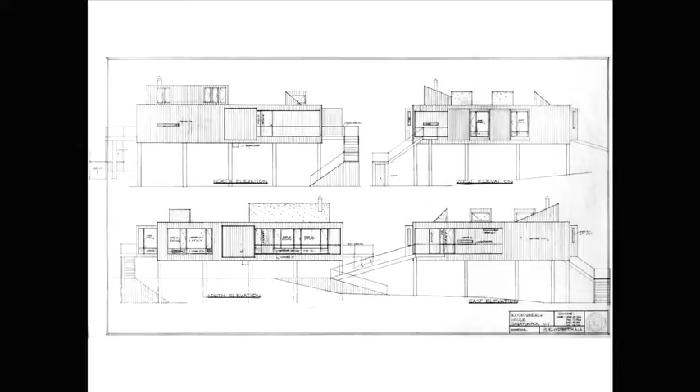Anyway, personally, I started designing and building while still in school. At the Yale School of Architecture in the late 60s, there was a culture of what one might call can-do. This was partially due to the ethos of the times, which was challenging the status quo at all levels of society. Perhaps it was a kind of arrogance as well.

For several of us, weekends were spent framing houses, learning about plumbing and electrical wiring, and explaining our designs to clients, who were spending very little money on these projects. Eventually, this led to the beginnings of the Yale Building Project, which continues as a first-year studio project to this day.

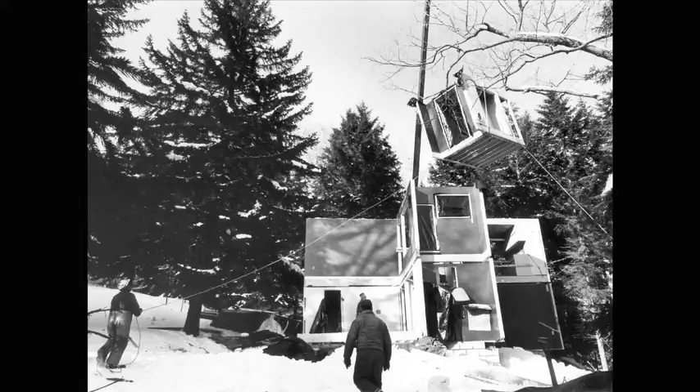These are 2 houses I built during this period, one with my own hands and the other partially so. There were several others, including prefabricated and modular buildings, following are images of past and present work that we have built since those very early days.

For me, from the beginning, the means and methods of building have always been inseparable from the equally important conceptual thinking at the heart of crafting architecture. Design has always been a seamless enterprise, starting with analysis of a client's wants and needs and concluding with a finished working building. Never did it occur to me that one might first design a building and then figure out how to build it, or for that matter, give it to someone else to build.

From a philosophical point of view, a further contention is that theoretical and aesthetic claims can best be evaluated when they are embodied in real buildings, which makes demands on architecture that paper and computer schemes do not.

It follows that the deeper architect's engagement in the entire process, from the earliest phases of conception to the final details of construction, the greater the chances for the actual realization of a design and the emergence of good architecture.

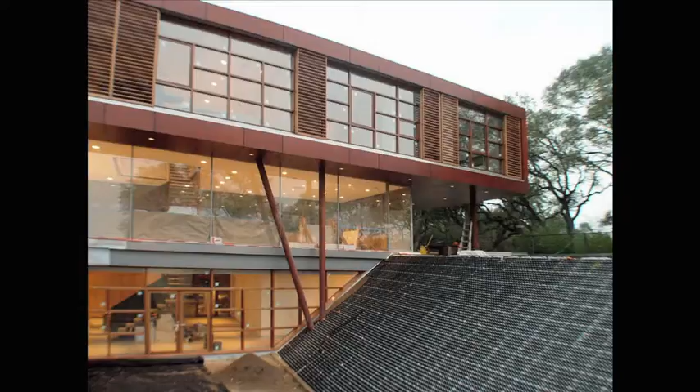From a more prosaic perspective, we attempt to bring into alignment the needs, those conceptual attributes of a successful building, its context or its fit into its place, its program or use, its structure or its sculptural material presence, and its social imperative or its value to society as a whole.

Complete overlap would in fact represent the perfect diagram. Of course, the perfect diagram is unachievable, but the greater the degree of this overlap and the quality of the poetic expression of that overlap in the building's final form is, to a large extent, the measure of its success.

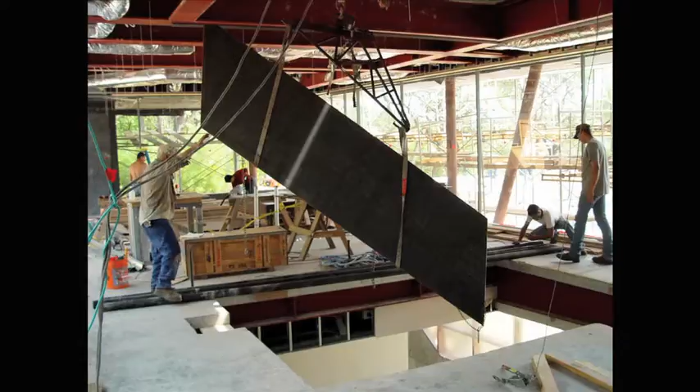What is the process by which we get as close as possible? We accept, in fact, we value the messy evolution that will occur during the development of any initial premise. Our design process is not a straight line. Rather, it is conceptually unpredictable. The process responds to the buildup of information that qualifies and colors design and makes the result rich and relevant.

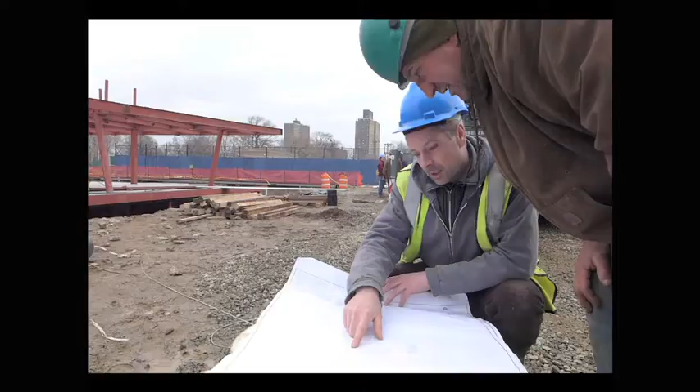It is a process seeking feedback from the many forces at work on its realization. We start designing knowing that we have great holes in our understanding of how the design of this building will evolve. So rather than fighting to keep our first idea pure, we instead anticipate the struggle that challenges to our first thoughts will provoke. Additionally, involvement in construction allows the feedback loop and consequently the design process itself to stretch over a much longer period of time.

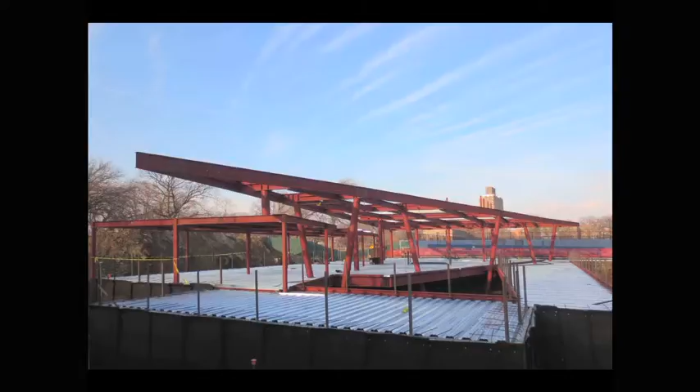We value all the players in our design-build program. We learn from all of our consultants, from individual subcontractors and tradesmen as well. Merging how we think and how we make into one single enterprise is critical to the development of our architecture. It is about making an architecture of substance.

We must have total access and transparent relationship with our clients. Architect-led design build provides clients with a single source of responsibility, thus freeing them from becoming judge and jury in conflicts between designers and builders. ALDB facilitates a clear channel of communication, avoiding siloed realms of expertise.

Having control of construction allows us to experiment and to push technical limits of design. Our increased level of control provides us with the confidence to assume risks often avoided to the detriment of better buildings. As one of many examples, we have built several underground structures, risking problems with waterproofing that reduce the building's visual impact, are sympathetic to special landscapes, and embrace passive, sustainable design.

We have organized this talk into a series of narratives or stories that we think best illustrate what we do. Our four principals, Thomas Gluck, Stacie Wong, Marc, and Charlie Kaplan, each will give a short discussion that provide insights into our architect-led build process.

Hopefully, I will win the bet. Thank you. Thomas.

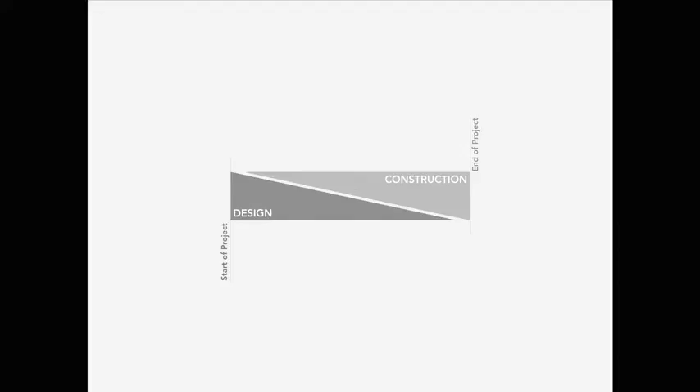The essence of our process of architect-led design build hinges on the knowledge and information gained by having contact with construction. In the traditional model of practice, there is little, if any, overlap between the thinking and the making. It is well known that design informs construction, but we find that construction is equally relevant during design. In fact, we often find its greatest value occurs during the earliest parts of the design process. For this reason, we have organized our practice to maximize the opportunities for the exchange of ideas between what we feel are the two inseparable acts of thinking and making.

It is the constant feedback and integration of construction knowledge during design and design sensibility during construction that not only allows us to realize our visions at their highest levels, but informs every aspect of the design process, from its conceptual underpinnings to its material detailing.

This first vignette illustrates how a project's most basic concept can be informed by how it should be built. In effect, our experience as makers shapes our process as thinkers.

The project is a house on Lake Michigan for a family of 7. The clients were raised in Northern California, and although their careers brought them to the Midwest, their hearts are tied to the West Coast. We were contacted to look at a potential site that the client was hoping to buy, but was known to have bad soil.

The site had been vacant for over a decade, passed over by many potential buyers. Before committing to the property, the clients needed to know if the site could be built on efficiently. When we visited the site, we were impressed with 2 experiences. The first was the experience from the bluff, 30 feet above the lake, a horizon of blue sky, blue water, and green grass. Equally compelling, but far more surprising, was the expanse of sandy beach at the bottom of the bluff, which was more reminiscent of California than the Midwest.

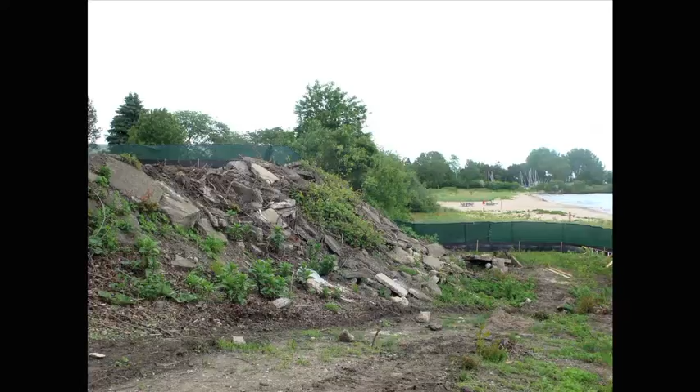Along the way, however, we very clearly encountered the problem. Poor soil was an understatement. The edge of the bluff looked like a construction landfill. Research revealed that the site was created in the 1930s when the North American location for the Baha'i Temple was being built. You can see the bulkhead in place to support the coming fill and the foundation for the future temple. Today, the temple stands directly across the street from the project and, given its scale, became one of the site's defining characteristics.

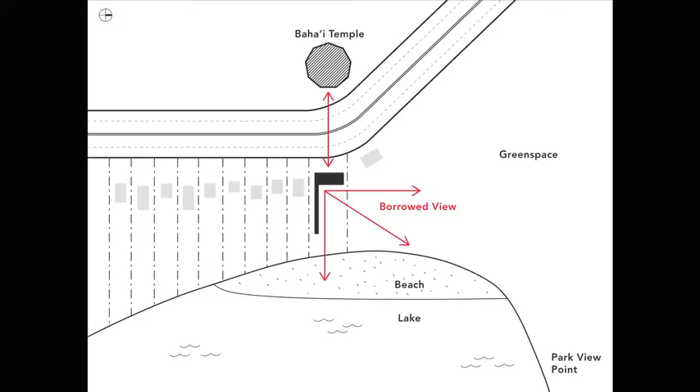This diagram illustrates the primary site strategies: contend with the institutional scale of the temple and sightlines from the busy urban street, and optimize the unique geography with its wide sandy beach and open green space to the north.

But before we could start designing, and before the client could even purchase the land, we had to contend with the soil. The logical solution was to locate the building on good fill, close to the busy street, but uncomfortably close to the temple. Moving it closer to the edge of the bluff would require an enormous amount of soil removal, replacement, and compaction, an expensive prospect given the depth of 30 feet. Piles and caissons were not an option due to the inability to drive and drill through the fill.

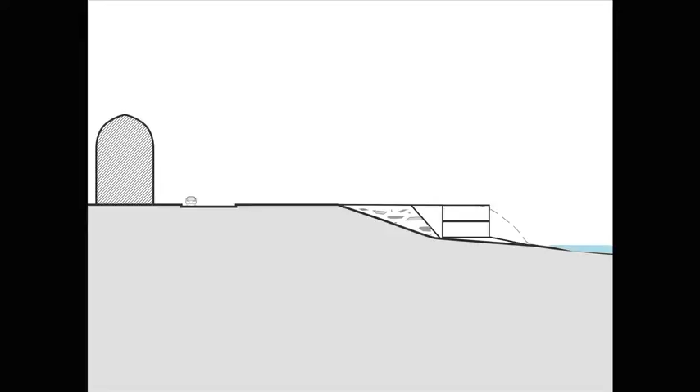Our solution: replace the bad soil with the new building. Still in pre-design, we vetted the concept not only with our engineers, but also with excavation, sheeting, and concrete subcontractors. Comfortable that the premium of the foundation could be mitigated, the clients bought the property.

Starting now with a technical solution of embedding the building into a bluff, we refined it to further accentuate the unique characteristics of the site. By pulling the building apart and following the line of bad fill, we were able to create 4 distinct outdoor yards, thereby stretching the program out over the entire property, allowing for more diverse and more specialized relationships of the building to the environment. The project then becomes about its section, a procession through a series of indoor and outdoor spaces as one descends down through the bluff to the water's edge.

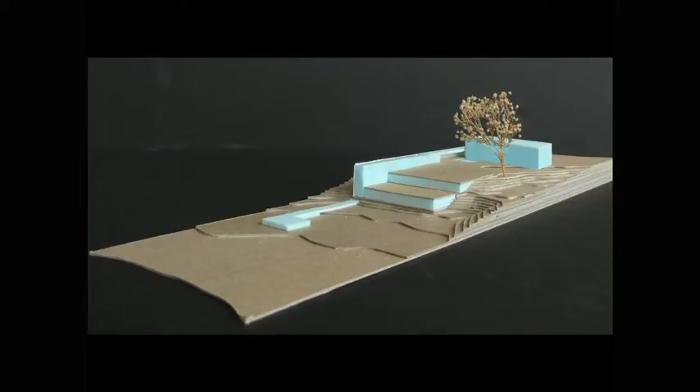At this point, we were in early schematic design, and the conceptual underpinnings of the project had been developed directly from a strategy regarding its construction. But we wanted to further qualify the assumptions about the foundation by jumping ahead to the next big engineering issue. We knew that by burying the building, a very tall retaining wall would be needed, and given the one-sided lateral loads from the soil, the entire structure would be prone to sliding. The initial solution proposed from the structural engineer shocked us.

A wall 36 inches thick with number 9 rebar 6 inches on center and a 4.5-foot deep key to keep the building from moving. We pushed our engineers to look for alternate options, including tiebacks, and then took these schematic sketches to various subcontractors for preliminary pricing. All the feedback was bad.

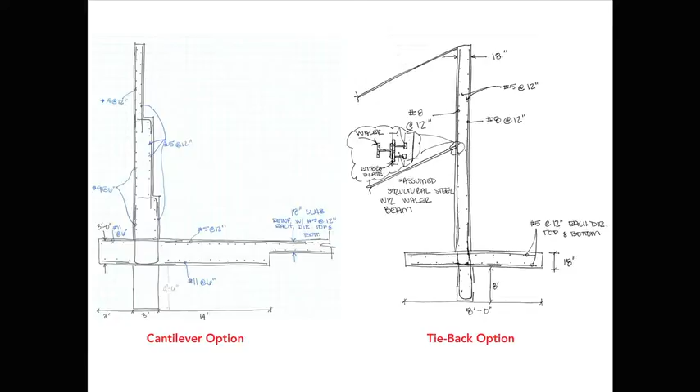Although we had avoided much of the cost related to the excavation, the foundations were still going to be a premium. Then one subcontractor, who specializes in coastal engineering and remediation, suggested the use of a material called cellular concrete.

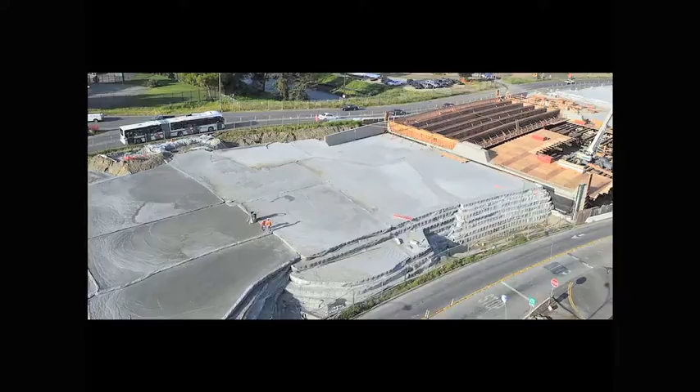Cellular concrete is a technique of infusing air-filled foam into a very liquid mix of concrete. It is used for infrastructure projects like this one. Note the scale of these pours relative to the workers standing in the foreground.

Its great advantage is that it has enough strength to hold itself together, eliminating any lateral pressure, but is light and porous enough to be used as fill.

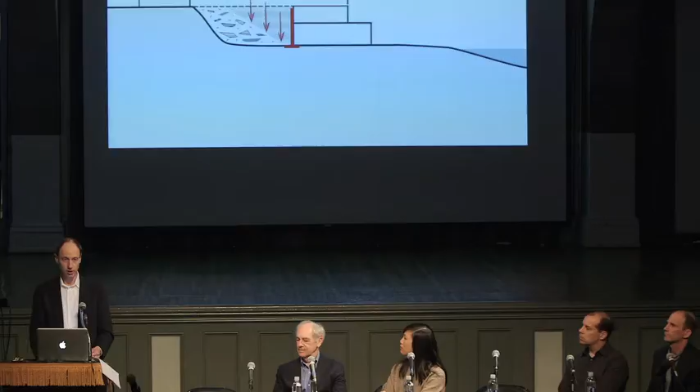Because its typical applications came from a related field, this solution was not available to us or our design consultants. If it had not been for our ability to access the building trades directly, we would never even have heard of it. In this way, we were able to reduce the wall thickness to a uniform 18 inches thick with only number 7 rebar 6 inches on center, and eliminate the deep key altogether.

As we were still very early in the process, these changes were seamlessly integrated into the engineering and the design of the building. When we tallied the costs by pricing the subcontractors, this package would reduce the foundation by $250,000.

That very week, at the client meeting, we presented the savings along with an option to upgrade the sliding glass window system that wraps the entire beach facade to a very slick zero sightline system from Switzerland. Spending money where you can see it is always a plus for the client.

Through this interactive process between maker and thinker, the schematic design of the building evolved to both embody all the goals of the clients, the aspirations to capture and maximize the unique qualities of the site.

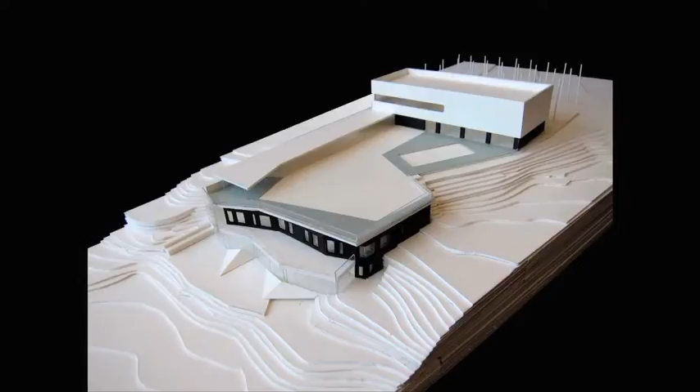While at the same time mitigating what made it unbuildable to those before them, which can be seen in this sequence of images, showcasing the experience of moving through various outdoor spaces, into the building, descending the stair as it winds through the house.

Down to the beach, culminating below in the main living space, forming the light-filled spatial spine of the building.

In doing so, the design captures the two main impressions from our first site visit: the view from the bluff for active outdoor play and recreation, juxtaposed with the experience of living on the beach.

While adding a front entry court capable of competing with the scale of the street and the temple, and adding a terrace off the bedrooms, remote from the public sequence, for quieter, more private outdoor activities.

The next few slides, taken during construction, highlight the process of excavation, foundation, and backfill using the cellular concrete. As with all the projects we will show today, we were not only the architects but also the general contractor, negotiating, managing, and overseeing all the work of the trades on site.

The senior project manager, job superintendent, and entire construction team were all architects and GLUCK Plus people.

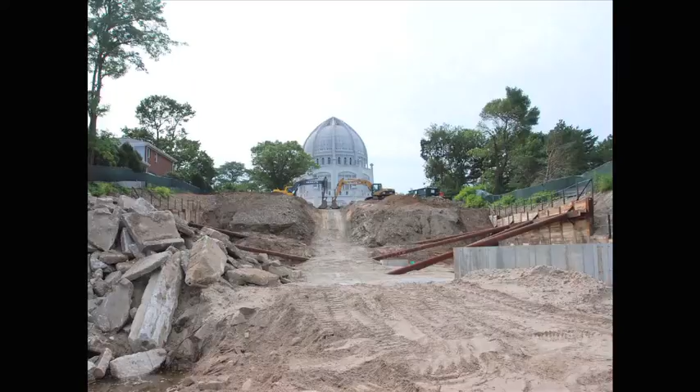Here, a view during excavation looking back up the construction ramp towards the temple, with some of the unearthed debris in the foreground. The sheeting is in place and excavation of the lowest level is complete.

The rubble you see in the foreground will be reused to form the revetment at the edge of the beach.

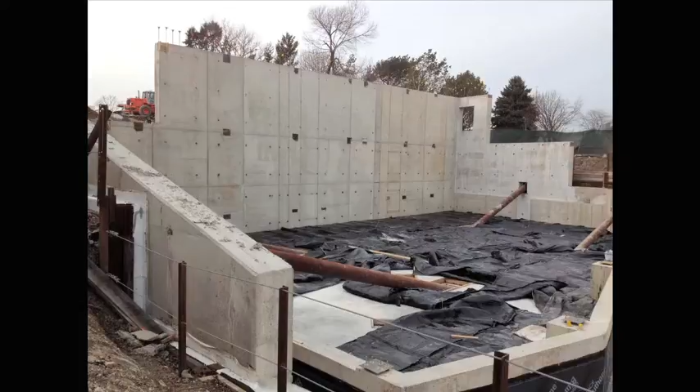The first of the foundation pours in progress, preparing for the retaining wall. Here you can see the thin uniform wall being formed and the back slope ready to be filled with cellular concrete. The foundation wall is complete and the form is stripped.

What we didn't realize until the sub showed up is that the high-tech material was delivered with a machine designed by Rube Goldberg, spewing material from a Dr. Seuss book. Actually, what you see here is the foam gun being tested before it is infused into the concrete mix.

The slurry of cellular concrete being poured.

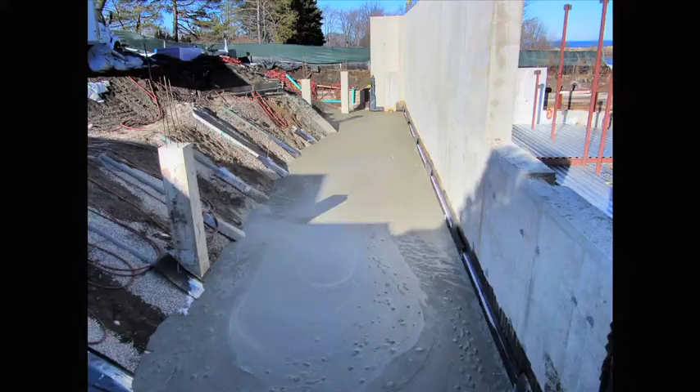This had to be done in 4-foot lifts, as the retaining wall strength, which ultimately would stand 30 feet, could only withstand 4 feet of lateral pressure of the wet mix. Thank goodness for fishing waders.

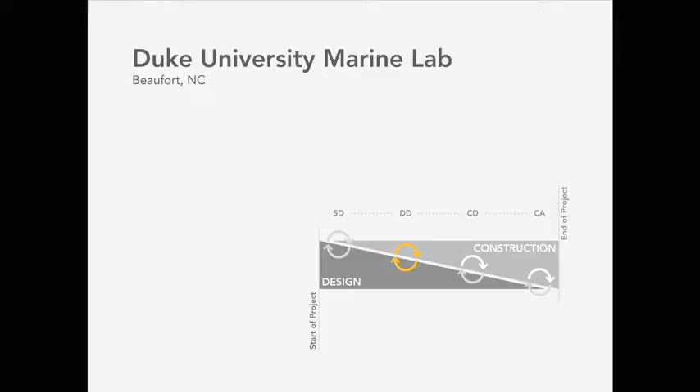Our process allows the confidence to push what can be achieved and trust that the building design will be optimized by the creative push and pull of thinking and making, the blending of theory and reality. So in this next story about a new marine science research laboratory for Duke University, our architect-led design build process shaped the ultimate design of the building.

Unlike the previous story, in which that occurred very early in the design, here it occurred in the middle of design development in response to new information received. This project explored a very timely issue: what it means to build along the coast, including the environmental and technical aspects and consequences of that decision. The setting was a remote field campus along the coast of North Carolina, a 3.5-hour drive from Duke's main campus, a small inner island within a larger barrier island system.

Duke had multiple objectives for this project. First, to design a state-of-the-art molecular laboratory to enable cutting-edge research and new ideas, while taking advantage of the natural beauty of the location, as well as providing outdoor spaces protected from the elements. Second, Duke wanted to energize the campus and keep it competitive by providing architecture that was current, functional, program dense, without feeling institutional or out of scale with the feel of the island campus, which had a small scale, a kind of rustic sensibility since it was developed in the 1930s and 1940s.

And third, the building had to champion an issue critical to marine scientists, and in this case it was sea level rise. According to Orrin Pilkey, after whom the building is named, and one of the most respected marine geologists in the field, to address sea level rise is to avoid building on the coast at all, or basically retreat from the beach, which obviously is not possible for an island campus.

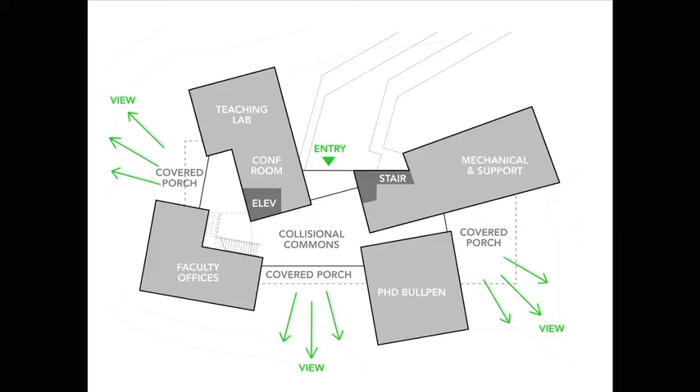On this first floor, all the community is surrounded around the collisional commons. The form of the building derives from the idea that the entire Marine Lab community is around this heart in the building and supports the research happening up on the second floor, which is packed to the gills with labs and equipment, in order to maximize research space and provide for future growth.

A simple stair constructed of 1-inch thick steel plate connects this ground floor collisional commons with a diversity of gathering spaces up above for group as well as individual study, both indoors and outdoors, all while capturing these amazing views of the water and the surrounding barrier islands. Finally, Duke's most adamant directive was for the lab and equipment rooms to maximize floor and wall space dedicated to research, experiments, storage, and equipment.

The scientists were in such desperate need for storage that they said to basically just get rid of the windows in the lab, which would have been a very short-sighted decision. So we met their challenge while preserving views and daylight by strategically placing windows at desk height and at clerestories, which from the outside resulted in a very simple expression.

But to achieve this end result that met all of Duke's criteria was not a linear path. The initial dilemma, which we recognized in the first month of programming, was that Duke's budget didn't match what they needed programmatically. The last research lab built on campus was in the 1970s, and they desperately needed a state-of-the-art facility to attract 3 new faculty members and their accompanying research staff. The program, however, was 37% larger than what they could really afford, which would have translated basically to the loss of 1 faculty member, which was an unacceptable proposition.

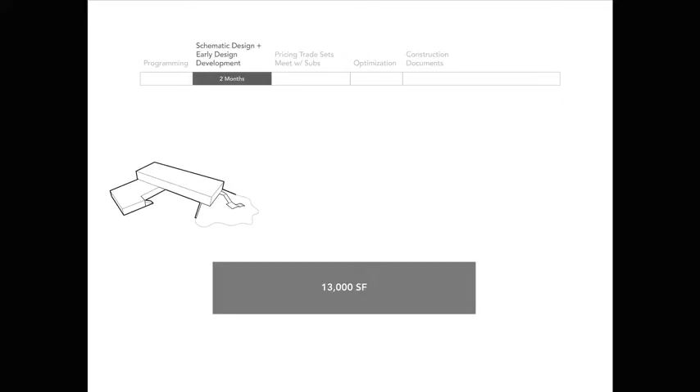And then we took that design and we drew up preliminary pricing and scope sets and started testing the local construction market to basically see what subs were available, to understand their skills, and through direct interaction with local subs, determine what the building cost, trade by trade, in order to target how to make the building better and to get it within budget. So through this exercise, the pricing revealed that the building was $5.5 million, or $800,000 over the budget.

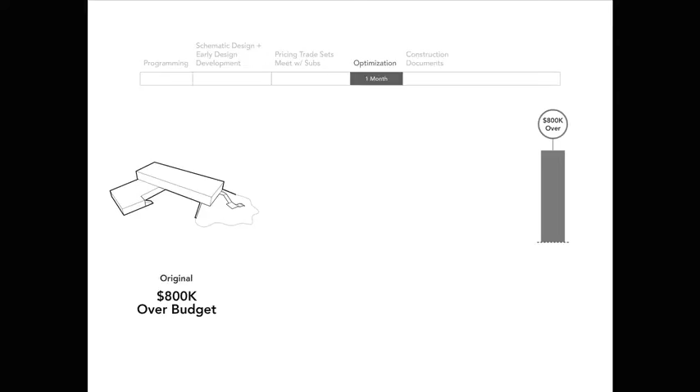So from a positive perspective, I guess the building was only 17% over budget, and we achieved a building that was 37% larger than expected, but we still had $800,000 to get out of the project. So we basically entered into a 1-month period of redesign and figuring out how to get money out of the building. So the making, or the interaction with the subs, definitely shaped our thinking.

So to reduce costs without losing program, the most cost-effective way was to basically take the form that we had, maximize the overlap between the first and second floors, which resulted obviously in an uninspired design, as this basic rectangle couldn't possibly meet all of the aspirations that Duke had.

So we took this opportunity to make the design better and not just about being less expensive. And we started to shape the building, creating a wider diversity of spaces. And then through this process, we honed in on the fact that the reason for the building was about the spaces in between and not about the building form.

By redesign, we found the true essence of the building. And the building visually and conceptually became not just about sea level rise, but it also became about the collisional and collaborative nature of research.

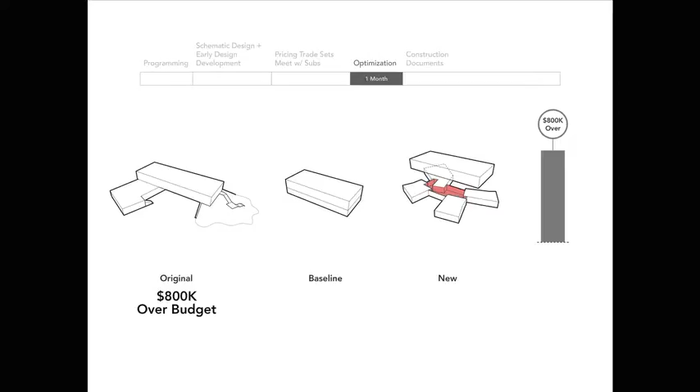And we were able to redesign with more information, with real cost information from actual subcontractors in order to make the building better. But we still had to make sure that this design would also bring down costs, and we knew that we were targeting that $800,000. So, especially since we would be constructing the building with the guaranteed maximum price, we really had to make sure that we were going to be able to achieve this.

So we took these 3 buildings, the original, the baseline rectangle, and this new collisional form. And through direct contact with the subs, took every trade, determined what in that trade was driving up costs, and used that input to inform the design changes that were being made.

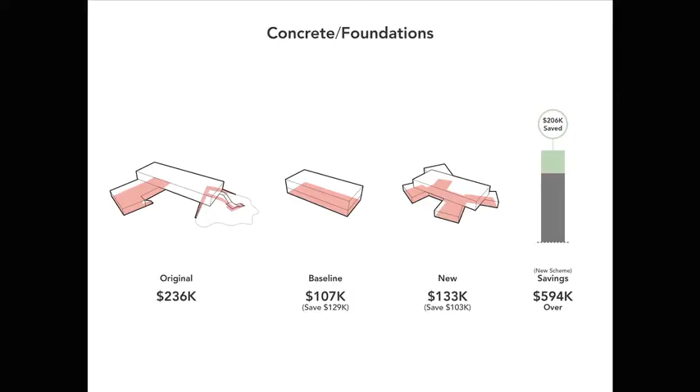So we reduced the size of the building footprint to affect excavation as well as foundations. We created greater overlap between first and second floors to reduce MEP, horizontal runs, the amount of masonry, carpentry, and roofing. We reduced the surface area of exterior cladding and soffits, found lower cost glazing systems, placed outdoor decks on grade to reduce stairs, railings, decking, and complicated roof details.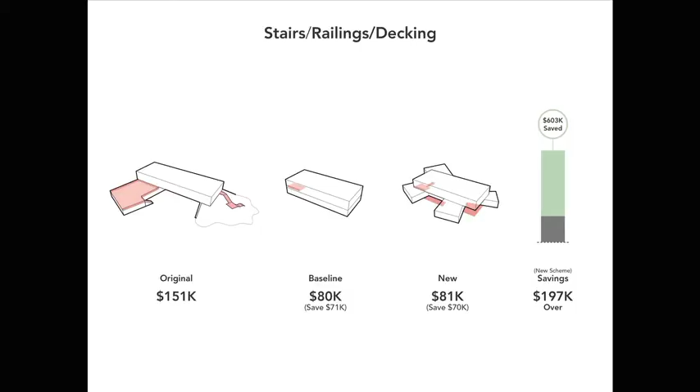We worked with local subs to find alternate systems for interior finishes that didn't alter the quality, but were more cost-effective based on local practices in the area. And the resulting compressed footprint also simplified landscaping and paving. And with these lower construction costs overall, the associated fees, insurance, and contingency costs reduced accordingly.

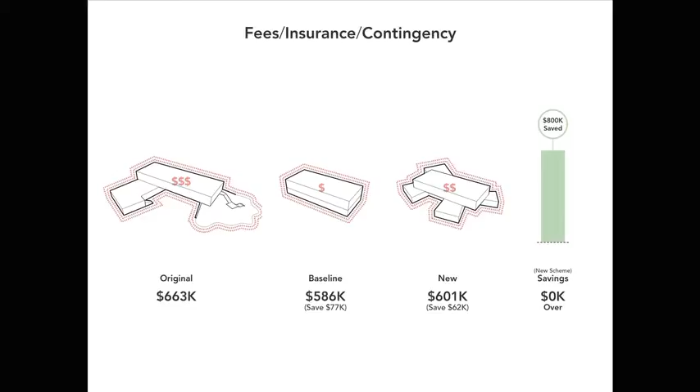So this effort resulted in a building that met the client's aspiration for the price they could afford. The baseline scheme did prove to be least expensive, not surprisingly, and that was approximately $120,000 less expensive. But this transparent and comparative design and cost exercise allowed Duke to make an informed decision on what the building should be and how much they wanted to spend on it.

Like most buildings, cost is one of the biggest drivers, and through our ALDB process, we found that the essence of the building was revealed through that struggle with the budget, and that the design got better for it. By being both makers and thinkers, not only were we advocates for Duke's budget, but we were also fighters for the design.

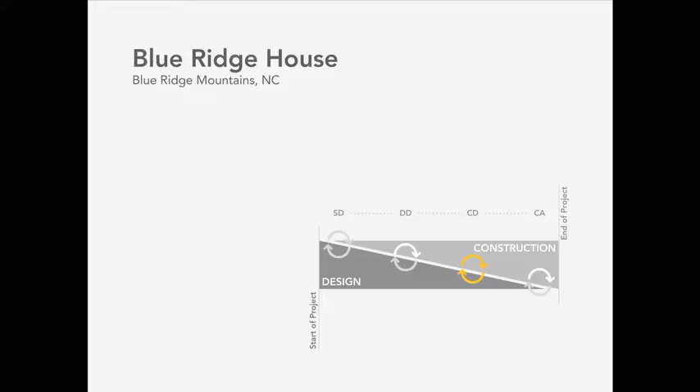So we thought we'd change scale a little bit and highlight two projects in which the ALDB process allows for extremely nimble and effective detailing. Our involvement in the fabrication process not only reinforces the design intent, but often allows detailing that would be prohibitively expensive with traditional delivery methods.

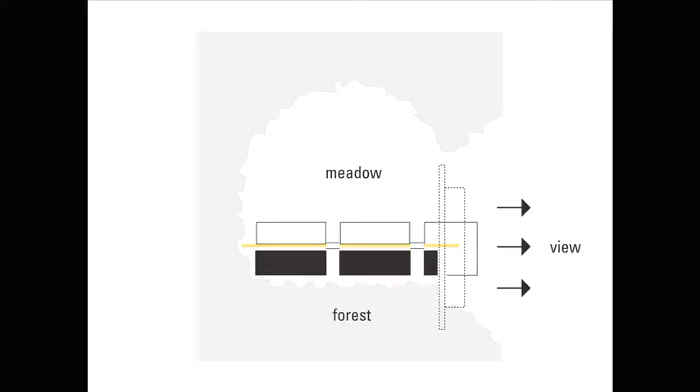The first project is located in North Carolina and is situated on a bluff overlooking the Blue Ridge Mountains. Diagrammatically, it's a linear house justified along a tree line, and by siting the project along the edge of the property, we were able to maintain a meadow space in the foreground, tuck the sleeping spaces along the tree line, and push the living spaces out over the edge of the bluff. The plan is made up of a series of smaller cabin-like elements leading to the main living space, which frames a view prominent over the mountains.

It was determined early on in the design process that there needed to be a unifying architectural element to enforce the experience of transitioning to the view. At the very end, the house engages the bluff with a two-story space opening to the view.

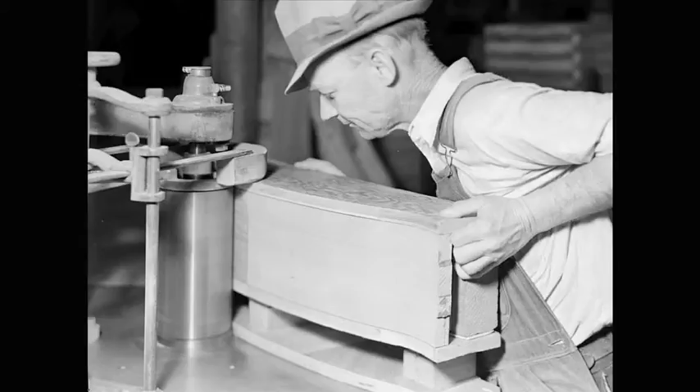Historically, the Blue Ridge Mountains have been known for high-quality handmade furniture production, and in turn, we came to find out that the wood and carpentry tradesmen in the area were very skilled, and we were presented with the opportunity not only to collaborate side by side with amazing craftsmen, but embed a historical and contextual reference to the project.

The entire region was also known for its lumber mills, and the inspiration for the sticked lumber wall came from the imagery associated with the lumber trade. This is actually a pile of sticked lumber that was on the original site when the owner purchased the property.

So once this design idea was identified, it was now on us to determine how to translate that idea to the physical fabric of the building. For it to be successful, the wall needed to read like a true stack of drying lumber, meaning that it had to embody the random characteristics of the wood, the color and the grain, the various widths, the spacing, and most of all, the ends of the pieces needed to read as a massive grouping running all the way through the building. Given its size and the sheer amount of wood it would take to build, we realized we had to be very focused on how to execute the construction of the wall.

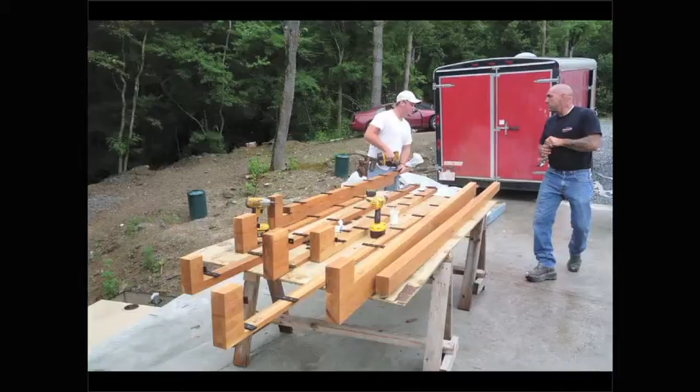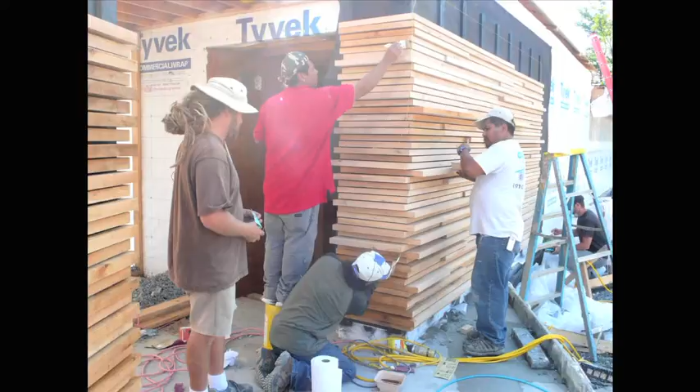To achieve this goal, we needed to find a group of local craftsmen to collaborate with early in the schematic stages, to vest their skills and knowledge with our management abilities. This exchange is always collaborative. Often we find very skilled labor capable of executing the work at a very high level of craft, but they simply need a hand understanding what they're being asked to do. We try to build solid working relationships with all of our subs and tailor our drawings to each one of them in order to convey the information in a language that's most understandable to the people actually doing the work.

The shop drawings were done in-house, piece by piece, each one labeled and numbered by us, and we were working side by side with the craftsmen in the shop and in the field making required adjustments so the learning was reciprocal. The solution was extremely cost-effective, but most of all, its execution elevated the design of the project as a whole. In the end, the wall was a very simple idea, but it required an extremely careful and managed execution in order to achieve a unified architectural expression.

And when the project is complete, they can return to our office with the knowledge of building a building and the knowledge that changes the way that they design for the better.

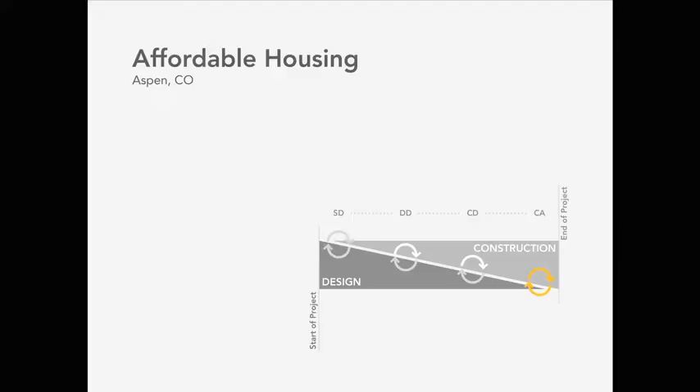The second example is an affordable housing project in which we acted as the developer, the architect, and the builder. The project is located in Aspen, Colorado, so the idea of an affordable housing project may seem strange, but the reality is that few of the town's base labor force actually live inside the town. Most of them live miles and miles away down the valley. We had done two free market properties previously, but we were committed to develop this site and address this social condition directly.

The plot is situated at the base of a steep hill on a lot that was once a working silver mine, directly adjacent to Aspen's main ski lifts. The prime site had remained empty for years due to environmental mine tailings contaminating the site.

The project uses a palette of industrial materials, one of them being corrugated metal, to relate to Colorado's strong mining heritage. Historically, cladding materials like these were used for their economy and practicality, and over time their decay led to an industrial aesthetic that is simple and beautiful in its own right. Modern building practices require more sophisticated exterior envelopes, resulting in corrugated metal wall detailing that is heavy and unrefined. This has led to the association of those materials with cheap construction.

The more elegant alternatives employ welded corners, which are clean and precise, but extremely expensive, in turn undermining the intrinsic economy of the material itself.

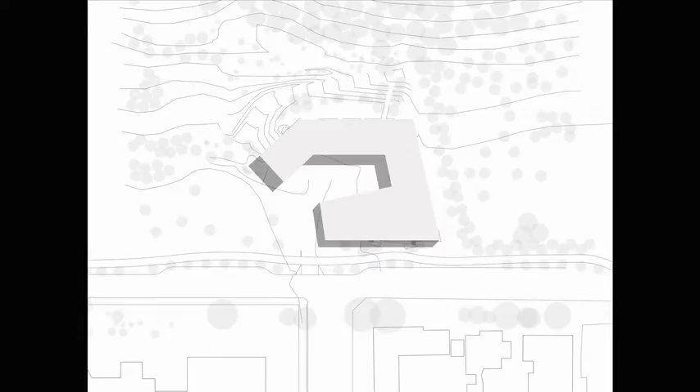The project is broken down from one central mass, with circulation and view corridors leading to the hiking paths beyond. This creates a series of smaller units, which, from a design perspective, create more desirable corner units and reduce the scale of the project visually. The result, though, is a lot of corrugated corners with various angles and no two of them the same.

The welded corners were priced against the standard details and the results were staggering. The welded corners actually added about 60% to the cost against the entire rest of the corrugated metal package. This is a typical situation where the detailing threatens the realization of the design. It required us to modify our initial idea and develop a flashing detail that accentuated the mitered corners.

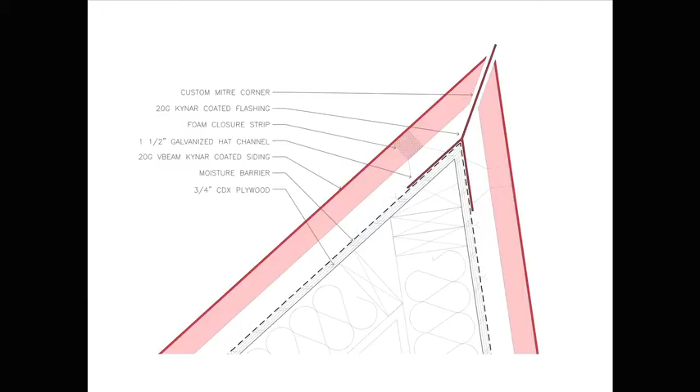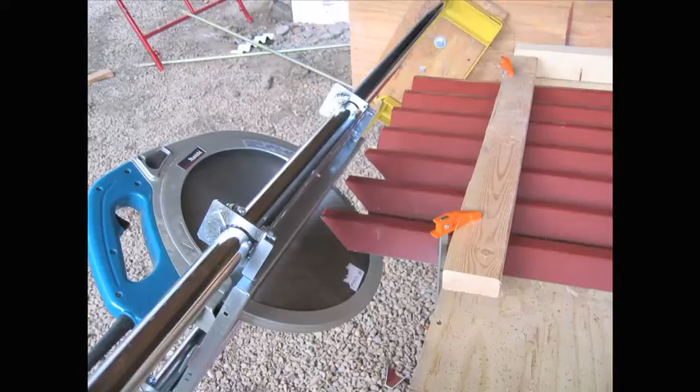There wasn't a tool readily available to cut the corrugated metal at the various angles, so we simply designed a new tool, and a very, very low-tech one for that matter. We purchased a heavy timber framing saw, mounted it on a sliding carriage, and made it an adjustable rotating platform. Our control over the process allows us the flexibility to build a tool to express the design detail and do so in a very cost-effective way. This is a comparison between the savings of the welded corner and our saw.

The resulting detail is water and airtight in the same way that the standard details are, but it's more flexible and can accommodate the various angles of design. At the same time, it's more elegant and refined in a way that highlights the various geometries and forms and the individuality of the apartments within.

Having control of both design and build allows us to work not just on high-end projects with intense detailing, as Marc just illustrated with the North Carolina wood wall, but also to bring design to projects that can't normally afford design. In this next project, our ability to deliver a building under huge budget constraints tested the thinking aspect of our practice as much as any high-cost project. Specifically, how do you deliver a well-designed, quality middle school in an urban environment with a tiny budget and nine months to build.

In the context of the Lady Liberty Charter School, failure to deliver a school on time and within an absolutely fixed and bonded GMP budget would mean closure of one of Newark's first charter schools. In previous projects, we used the fact that we controlled the process from start to finish to inform our thinking and our making. In the context of the Lady Liberty Charter School, we quickly realized that we needed to radically rethink our own making process from start to finish.

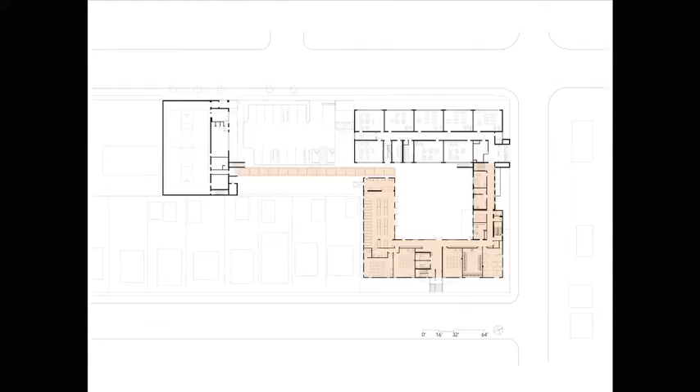Using the existing school as the lower school, we configured a new three-sided form around the old to house an upper school and create a central courtyard around which the whole community could organize.

The central courtyard creates many opportunities while solving many school-specific issues. An open-air connector connects the courtyard to the gym, creating a car court. Single-loaded building circulation in the classroom lines the courtyard, unifying the perception of a school center.

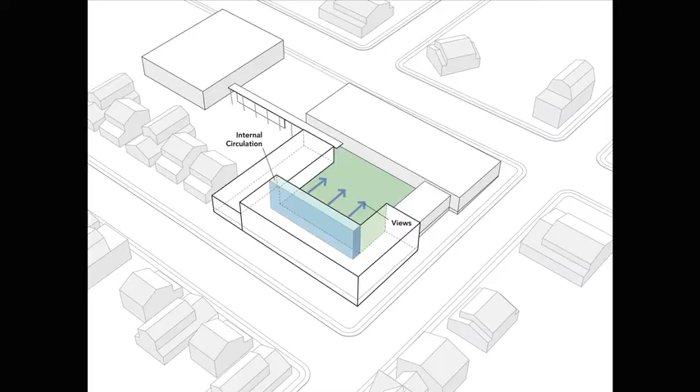The cafeteria accesses the space directly for recess and structured play. The dean and principal's office look directly into the courtyard as a kind of command central for school stewardship.

The building itself becomes a protective fence for kids at play and simultaneously shields the residential neighbors from playground noise. The courtyard becomes the main hub between lower and middle schools, gym, parking, and bus.

Overall, it is this structured between space that gives the place its unique identity.

As we typically do, and has been discussed tonight on previous projects, we did early pricing packages or trade sets to find out what we already knew, that on-site construction was very expensive and the schedule not very achievable. The school budget was half the typical New York school construction cost and significantly lower than schools we've completed recently, with an all-in hard cost budget of $225 a square foot.

Quickly, we began to investigate ways to build off-site, including what is sometimes referred to as modular building, but is really off-site construction, a custom building built in pieces in a factory. We looked at our own past projects.

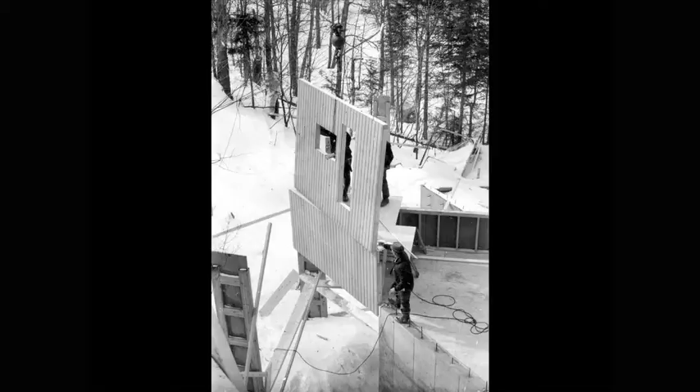In the early 70s, we designed a condominium using prefabricated wood walls and building components. Last year, we completed the Stack, a non-combustible steel and concrete multifamily building on 204th and Broadway in Inwood. But neither of these are schools.

There have been some modular schools built in the industry, but typically the technology has been used for homes, short span light commercial spaces, and dorms.

Continuing our research, we then made a road trip to Pennsylvania, the Northeast's answer to off-site wood construction, otherwise known as custom homes. We solicited bids from manufacturers of our courtyard scheme in both the wood modular and the steel and concrete, or as it is called in the industry, non-combustible modular sectors.

The non-combustible bid proposals worked well functionally. We could achieve 9-foot clear ceilings, column-free classrooms, but at a relatively high cost, $290 per square foot all in. Cheaper than on-site construction, but still significantly over budget.

Meanwhile, only a few of the off-site wood home manufacturers were comfortable taking on a school, though none of those that we spoke to had really ever built one. But we were hopeful that the typically $90 a square foot custom home numbers would translate into real savings for the school.

The wood bids did indicate savings, except that, due to the more flexible frames, much work, including siding, large window walls, and the HVAC system would have to be done on site, raising the overall cost well above the budget. Also bad, ceiling heights were compromised to 8 foot 6 inches due to the wood spans, less than ideal for a school.

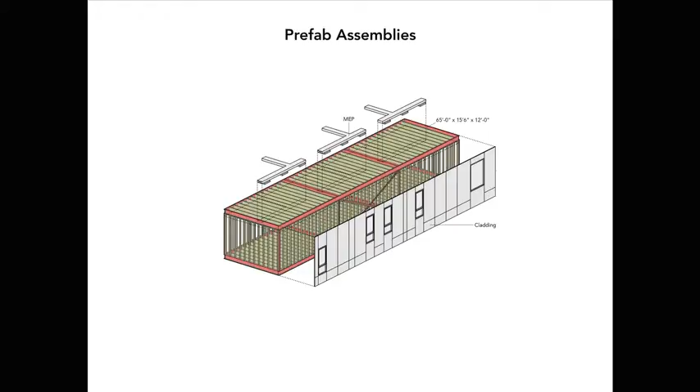The steel would solve the span and stiffness issues. The wood infill would reduce cost and weight. The spanning capability of the steel frame allowed for 9-foot, 6-inch ceilings and compressed the modules needed to 23.

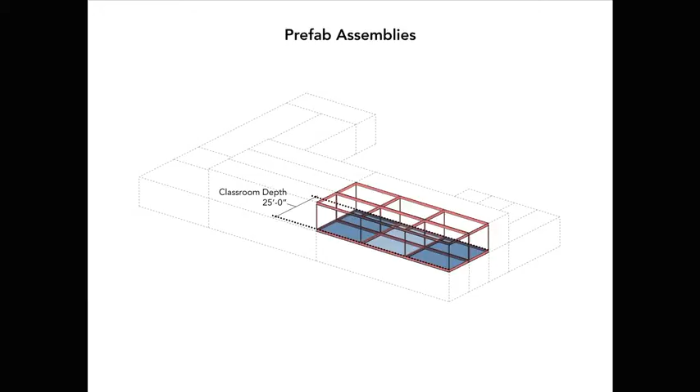With each module stiff enough to be built 65 feet long, enough to accommodate 3 classrooms of width, and 3 modules together making 3 full classrooms and an associated corridor.

The stiffness of the steel moment frame would allow for transport of maximum size modules and would allow for installation of siding and HVAC in the factory, reducing the on-site costs. The wood infill reducing the weight of the boxes, thus reducing the crane size and installation price.

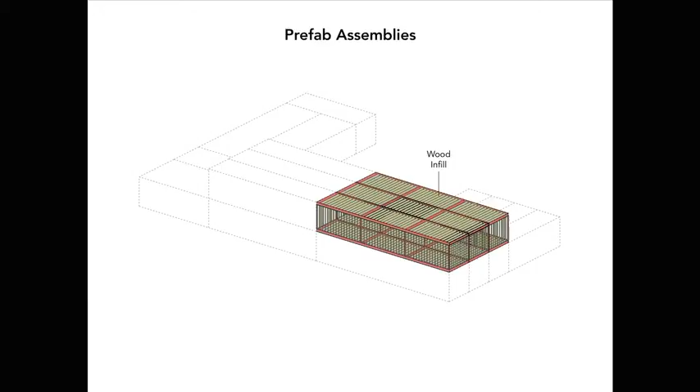We were now close to our GMP. The hybrid system had solved the biggest piece of the puzzle. But to reduce costs further, we looked at other ways to prefabricate.

We knew from our trade pricing that a lot of money was in the foundation. During our Pennsylvania road trips, there were more than one, and through conversations with manufacturers, we discovered that many modular homes are set on precast concrete walls.

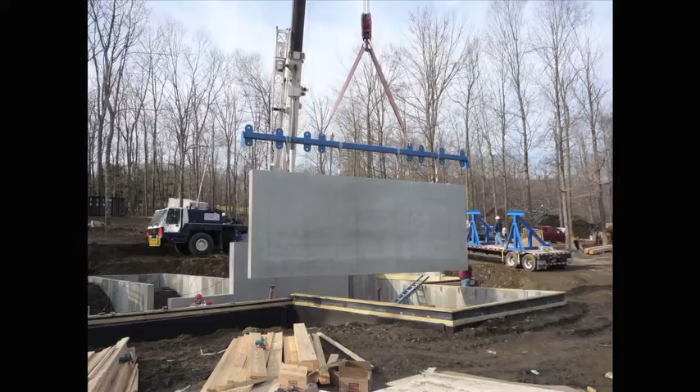We also had recently used a precast concrete system for its architectural qualities for a retreat in upstate New York. We wondered if the light weight of our hybrid steel and wood system might allow us to use this precast system, knowing that the non-combustible systems would have been too heavy.

Pricing packages were sent out to precasters. The walls are 9,000 psi and come with steel studs and insulation cast into the concrete, potentially further reducing site trade costs.

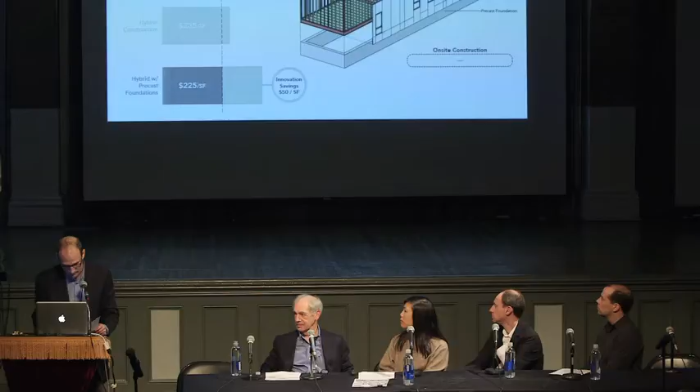The precast system finally pushed us down to our GMP budget and importantly helped us avoid pouring concrete in a very difficult winter. Nobody remembers now, but last year's winter was even worse than this.

The beauty of offsite construction is that while concrete was going in on site, steel frames and modules were being built in the factory. There, steel frames went up one by one, an individual moment frame for each module.

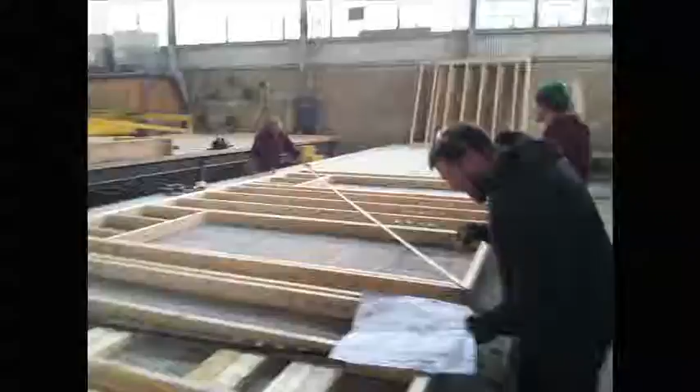Walls and floors are made in jigs. The moment frame is clad in wood and fitted with wood infill. Three modules, three classrooms, and a hallway are welded together in the factory and built up as one section of the building, then cut apart prior to shipping and shrink wrapped.

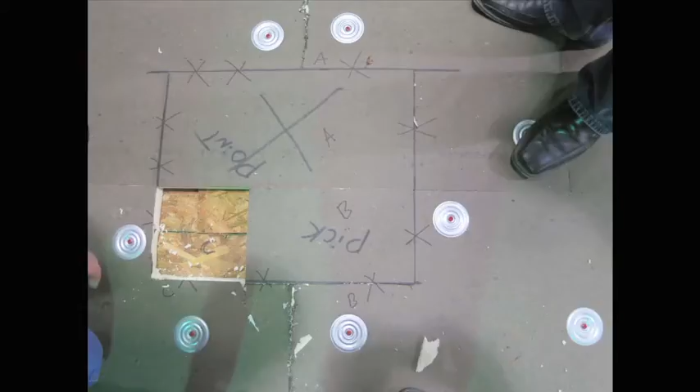Cutouts are left in the roofing system as pick points for the crane. At a certain point, practically the entire factory floor is taken up with a school, but still in pieces. After the plywood cladding...

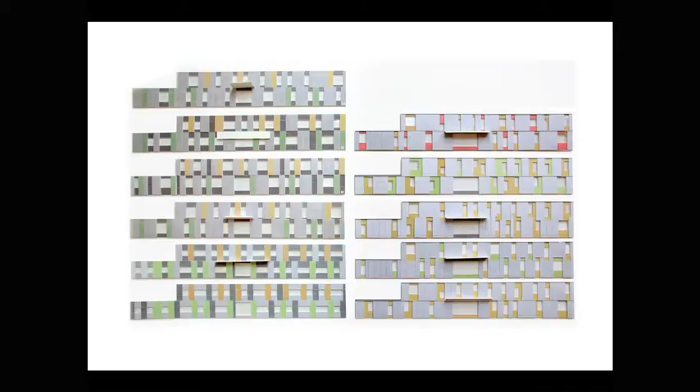Facades are ready to go on. In early design studies, we had looked at using patterns of color and texture that would be contextual to the street and as a way of identifying classrooms from inside and out. Once the hybrid system was chosen, we rethought the facade to optimize its expression within the factory and transport constraints.

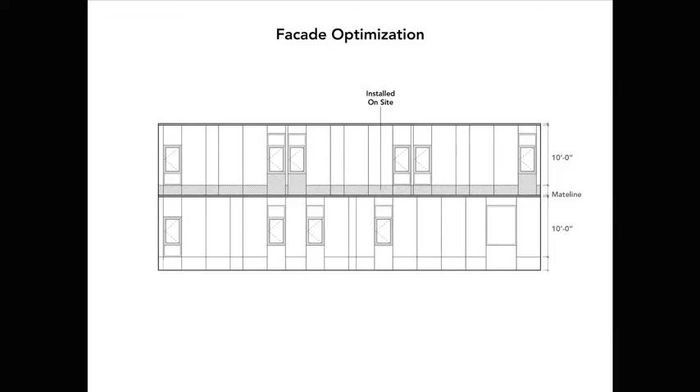In offsite construction, the mate line needs to be what the industry calls zipped up on site. Using inexpensive cement board and full 10-foot pieces as the baseline material, we created a central band spanning over the mate line. This minimized band could be installed on site, allowing the rest of the facade to be factory installed with minimized cuts.

Alternating color bands frame each room, creating a syncopated rhythm on the outside and a singular and corresponding color for each classroom.

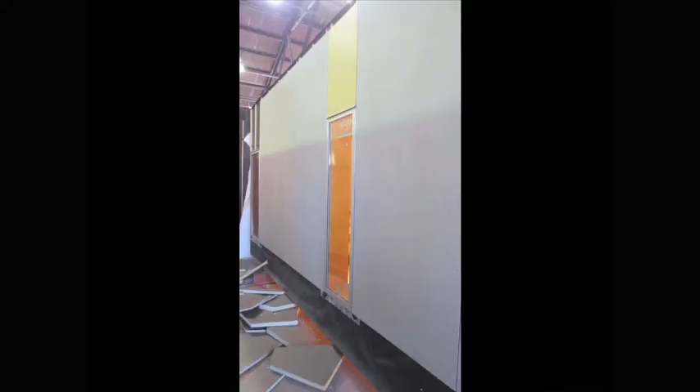In our construction contract, we guaranteed an August delivery. Otherwise, liquidated damages would accrue to the makers, and in our case, the thinkers also. And more importantly, school closure. With a November start, we had 9 months in which to put all of these hybrid systems together in a finished building with a certificate of occupancy.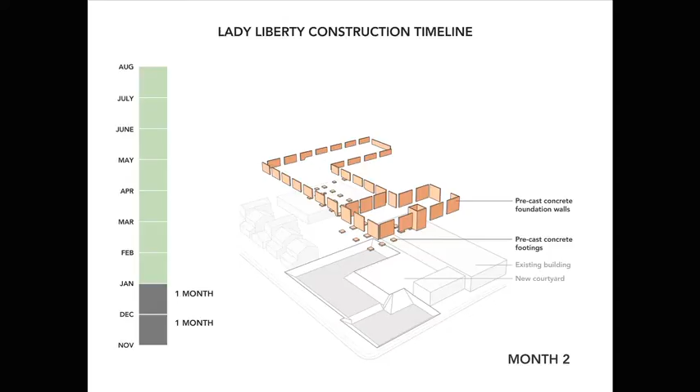In November, December, it was excavation, including placement of gravel footings for precast walls. In January, precast concrete install. This took about 3 days, but with weather and the phasing of the crawl space and basement, a full month.

Here, the precast walls coming to the site, craned erection of precast retaining walls. The precast walls come complete with studs and insulation cast in, ready for wiring and drywall.

It is now February. Site cast concrete should have taken 3 weeks. The weather delayed us a month to March. We now have 4.5 months to get a CO, and all we have is a foundation.

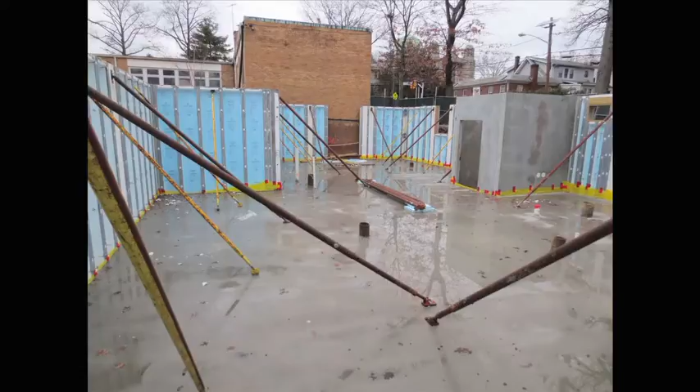With the slab in place, we have something to brace the tops of walls to, but they won't be fully locked in until the modules are set. April: the modules are actually installed in 10 days, 5 days of install with 5 days of bad weather.

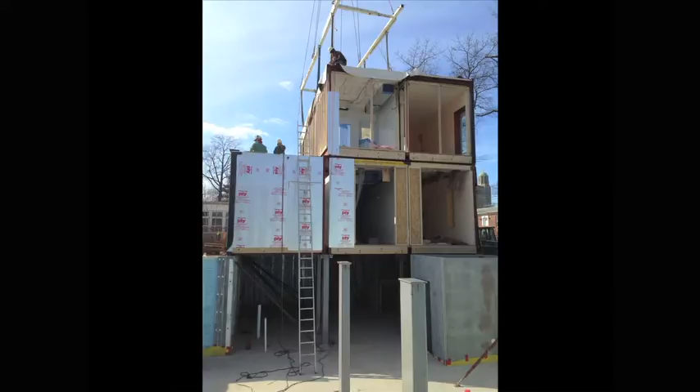Here are the off-site modules arriving down the city street of Newark, stripped of shrink wrap and lifted into place atop a crew scrambling to weld each box in place. And new modules set on top of the precast foundation, aggregated and welded together.

Zip up, or mate-line modular work. It's the last thing that happens, and it's the most time-consuming of all, turning a series of finished parts into a whole school. It takes us to mid-July to complete the zip-up.

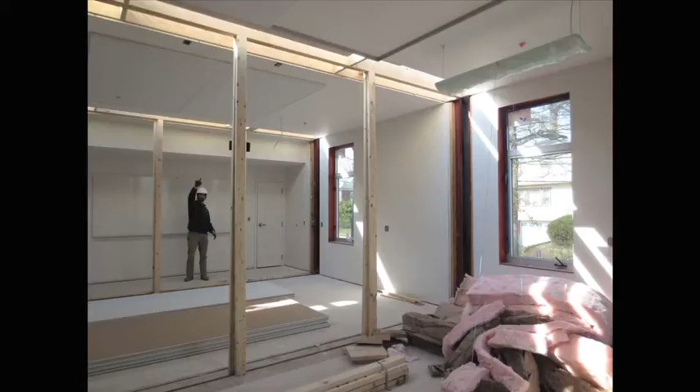Here you see the module, 1/3 of a classroom, with the whiteboards in place, ducts ready to be attached. The slots of light are mate lines within a classroom. Once all is trued up and insulated, mate lines can be sealed and painted. And now close. Only final runs of finished duct are left.

The last 2 weeks involve finishing touches and the certificate of occupancy, installing the factory-built canopy marking the entrance, and the connector to the gym, the final piece of the puzzle.

Lady Liberty has a permanent home with a central unifying court. We are not sure if they know that they live in a hybrid of sorts.

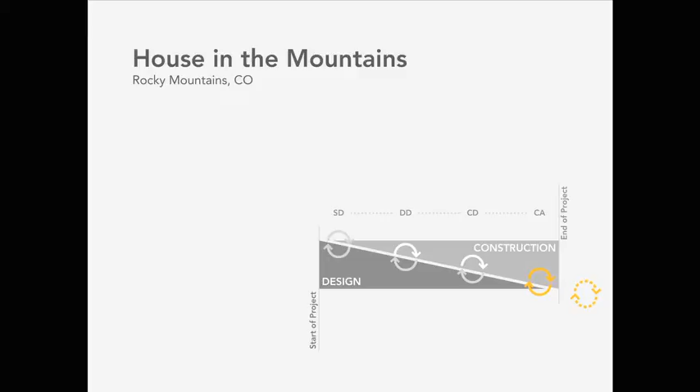In a traditional design practice, involvement with the project tapers as construction nears its end. The architect does inspection walkthroughs and generates punch lists. Contractors give a 1-year warranty and might follow through on it. Our involvement as architect-builder typically extends well past move-in and involves more than the punch list.

The next project is also organized around a courtyard, this one rural and residential, focused on sustainability and the life cycle of a building from conception until long past completion.

11 years ago, we designed a house in a steep north-south valley in Colorado. The full-time live-in owners wanted every room to face up the valley to dramatic views all around, particularly to the south. At year 8, they asked us to conceive a sustainable 2-bedroom house with an outdoor pool and hot tub that would not significantly add to their current energy usage and would preserve the views of the valley set up in the original house.

We considered sustainability first, not as a question of LEED points, but as a question of design. How could we configure the building in a way that was responsive to this incredible landscape? How could we situate the building not only to protect the owner's views and privacy, but maintain and celebrate the perception of the land as a whole, from their house, but just as importantly from the road and the mountains beyond?

Starting with a small court and meadow inscribed in the first project, we conceived of the new house as an extension and bookend to the original, forming a protected mountain courtyard with a sea of native wildflowers. Then we buried the plane of the roof in the earth.

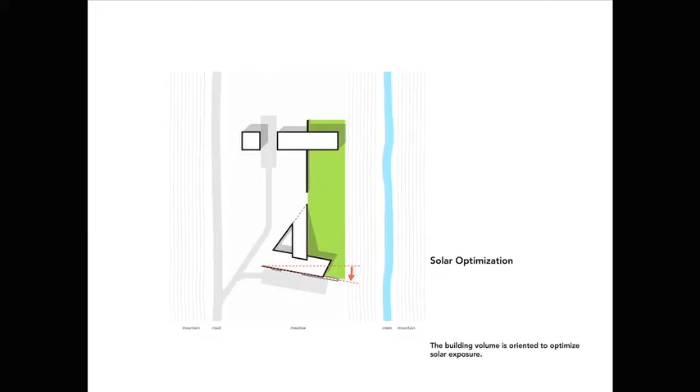The south side of the courtyard is then canted to face true south to maximize solar gain, creating a solar court. We studied the earth not only as an insulating medium, but as the stuff of the building itself.

The earthen roof lifts off the grade and separates to create living space and a sunken court, all but hidden from the road. The native plants of the mountain meadow allowed free reign over the building, the earth insulating the house.

This is the view from the existing house. The new building preserves and accentuates the original view. And looking back from the new to the existing house along the new courtyard wall, the sunken courtyard with fire pit and corten. On the south side of the house, in the solar court, the house is unearthed and exposed to the sun.

The walls are lined with 500 square feet of solar hot water panels to heat the house, pool, and spa. Rather than attach photovoltaics or hot water solar panels to a roof or set them on the ground as is typically done, the solar panels are conceived instead as a thick wall, not earthen here, but programmatic.

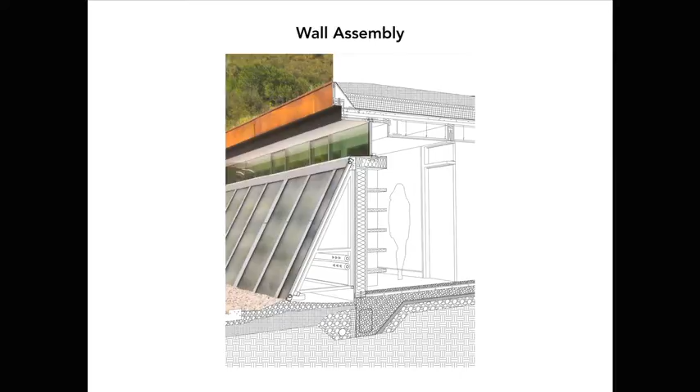Panels are canted 30 degrees to maximize winter solar heat gain when the ability to reduce house energy usage is greatest. The steel frame creates a cavity for solar piping and servicing. The exterior wall is inboard of the solar panels and built out even thicker with millwork.

The clerestory above bounces light off of this deep light shelf, using the sun to light the corridor without glare and with minimal heat gain. Operable windows in the clerestory correspond to operable solid panels in adjacent bedrooms, providing cross ventilation through to the main courtyard.

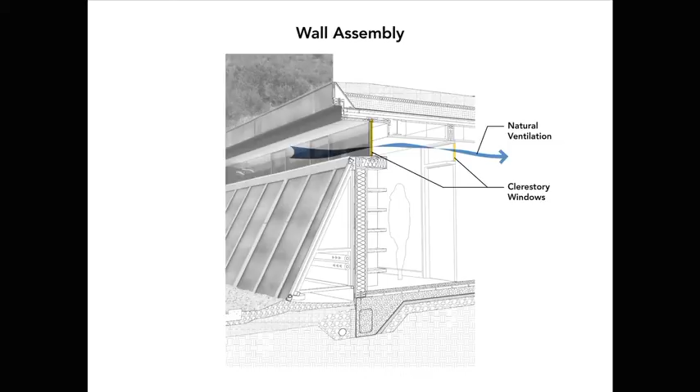Overall, the solar panels work to inject heat directly into the main heating loop, serving the three main energy uses of the house: domestic heat, pool, and spa. A smart controls hub divvies out heat, prioritizing solar usage over boiler, and is programmed in general to minimize natural gas usage.

The piping required to make these controls work and have flexibility is inherently complicated, even more so when considering the continuous clerestory that wraps the building to track the sun and views. How can a hot water solar system be controlled, especially when all of the piping needs to be run underground and land in scant few walls? Coordination is key to this install. Layout such as this needs a thinker's hand.

But what really happens to a high-tech, sustainable building when the building is finished? Can you simply plug and play, as we are so apt to want to do? Or is there an opportunity to tune the systems to how a space is occupied and used?

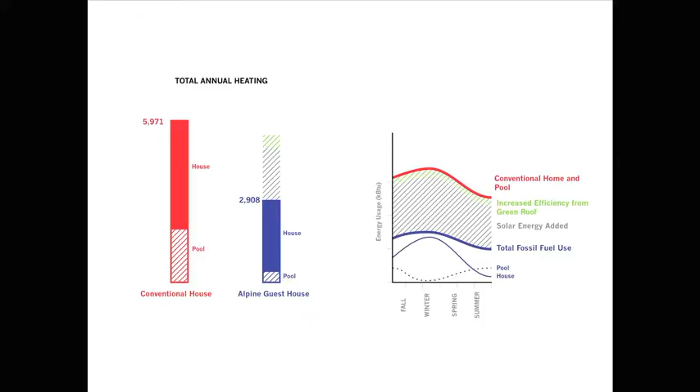Here, 6 months after occupancy, with the solar systems operational and performing to spec, we noticed in our monitoring of BTU usage what seemed like spikes in boiler usage on summer evenings. Clearly, the boilers were kicking in to heat the pool in the relatively cold Colorado summer nights.

We pooled our consultants, control sub, manufacturer, plumbing subcontractor, and solar manufacturer and owner, and found that by raising the daytime set temperature a few degrees above set point, we could store latent solar heat in the pool to bridge the cooler nighttime temps. On sunny days, boiler usage was reduced to 0.

After seeing how well this worked, we applied the same strategy in winter for domestic heat. We programmed the system to override daytime set temps when the house was unoccupied, increasing the set temp from 70 to 75. This allowed the massive concrete floor pavers to store latent radiant floor heat during the day and release it in the evening when occupied again, thereby lessening and often eliminating demand on the boiler.

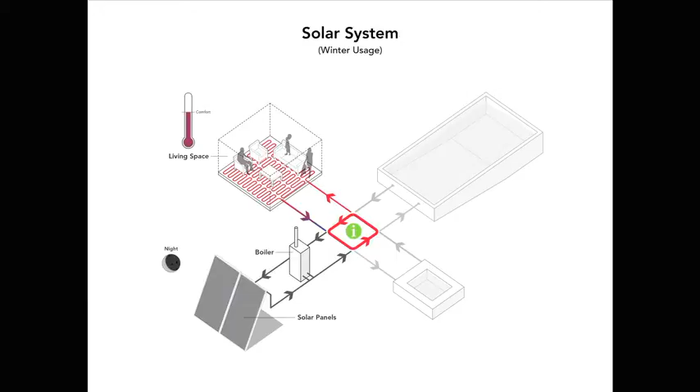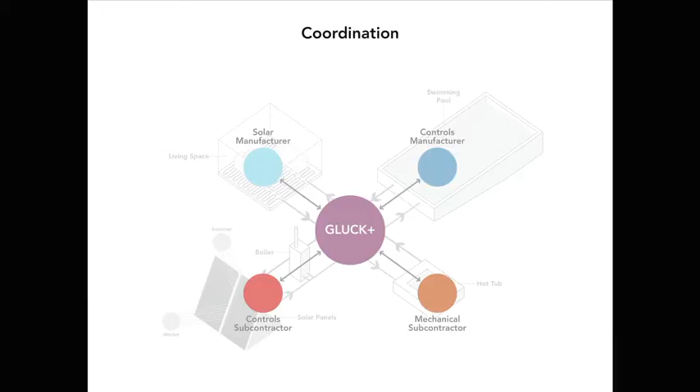These post-occupancy modifications were critical in making the system optimally sustainable and required thinker makers as central to the process, long after the C of O and move-in. Without the thinker and maker involved as the quarterback at the intersection of questions of occupancy, use, and technology, the system cannot perform at its best.

Even in projects that don't use high-tech monitoring and systems, today's buildings have an inherent complexity of systems that require more than the simple turnover of information in the form of product binders. We designed a series of digital and paper manuals organized around how the building is maintained, distilling information so that it can be used by the owner. Buildings are no longer only about space, but information too.

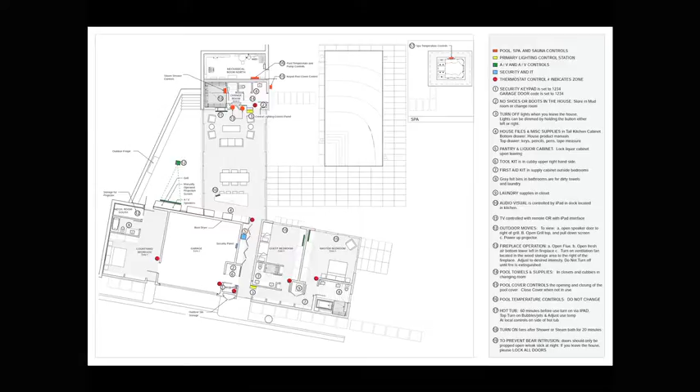Information in the myriad and overlapping building systems requires a designer still thinking about use in space to distill and dissect into color-coded maps, diagrams of AV systems, heating zones, and more. The goal is simple: that the user seamlessly understand and inhabit their space, ideally melding everyday living with responsible stewardship.

There are many more stories that we could tell. As making thinkers and thinking makers, we, as the architects, become active participants in shaping the story of each project, authors of the overall narrative of architecture itself. Thank you.

So part of my job here tonight is to focus the Q&A session on what's important to them. I think, as I said, for me this is all for the purpose of design, right? Other than a client's budget or a great service, they didn't really talk about their own business model or profitability or other things that architects who take this level of control tend to focus on. So I'd like to continue that theme as we talk about the issues this evening, and more focus the questions on how you achieve these things with your clients and how you prioritize some of that stuff.

So I guess for me, the most obvious question is: how did you initially get so comfortable with the idea of taking on so much risk? And what is the process for convincing your first client that this is actually right, that you should have the level of control that you desired?